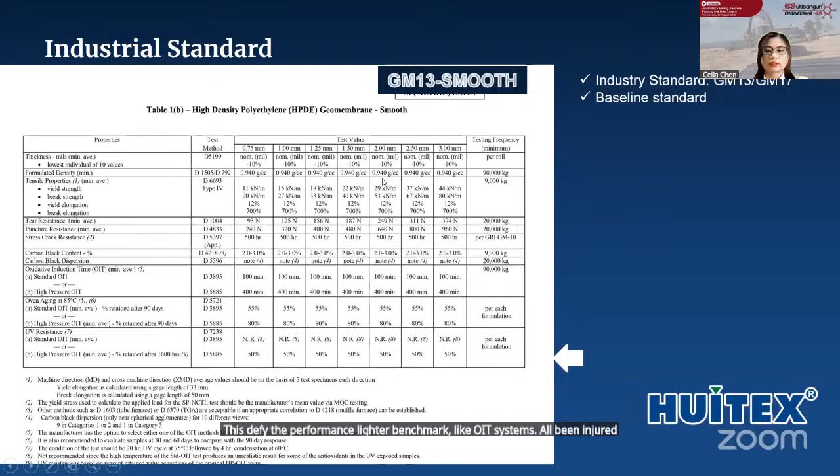GM13 is considered a minimum requirement, not a performance guarantee for every site condition. Passing this test means the liner meets the baseline. Therefore, durability is considered a critical index of the formulation's long-term performance. This defines the performance benchmarks, like OIT, oven aging, and UV resistance. But here's a key point. Just because two materials meet GM13 doesn't mean that they will perform the same. Because resin quality, the antioxidant package, and the manufacturing control make a huge difference.

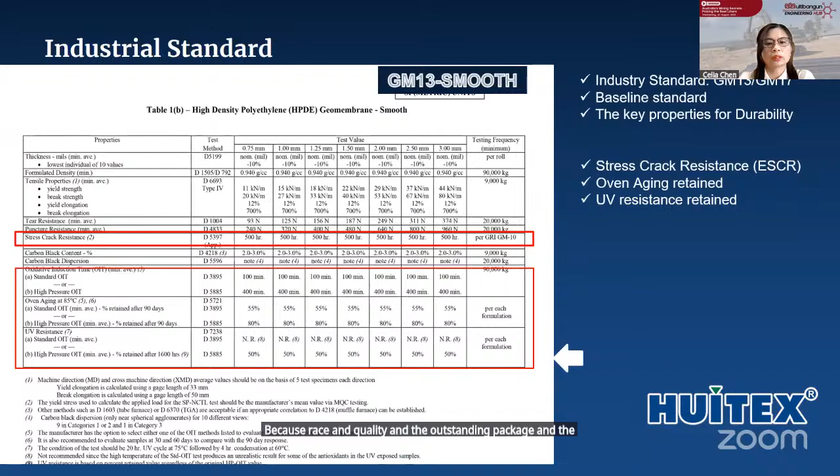Let's move to the Australian standard. In Australia, especially in Victoria, there's a guideline, the EPA Victoria Best Practice Environmental Management guideline. It sets the bar for a high performance membrane. These are built on GM13, but go further, requiring both OIT and antioxidant systems and adapting the formulation for harsher applications. So in this market, simply meeting GM13 is not enough.

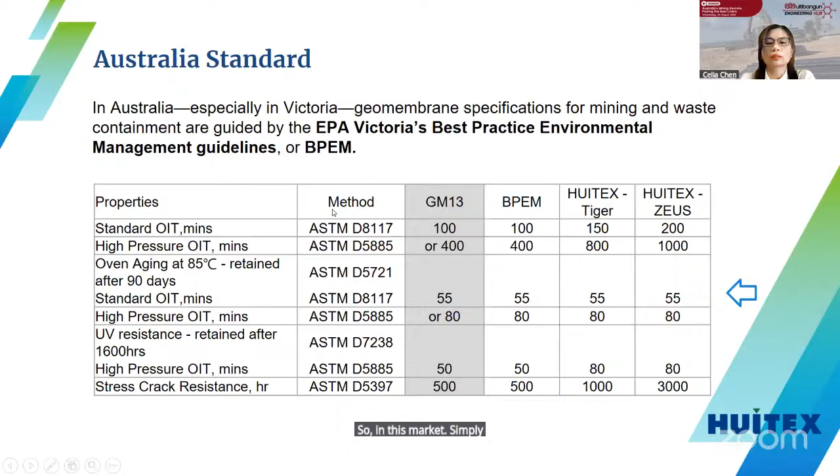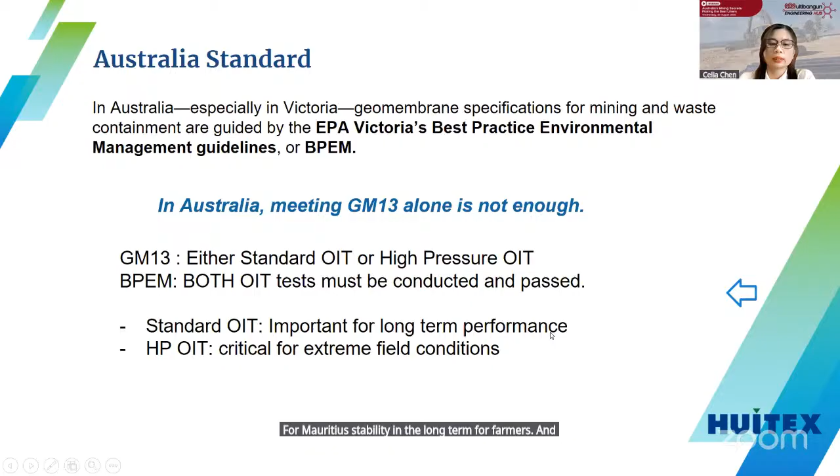Under GM13, a manufacturer can choose either standard OIT or high pressure OIT. Under BPEM, both tests must be conducted and passed, because standard OIT is for formulation stability and long-term performance, while high pressure OIT is critical for extreme field conditions.

So with these standards, in the mining industry the stakes are really high, environmentally and financially. A liner failure can cause contamination, legal consequences, and millions in losses. That's why GRI standards are required by clients, consultants, and even regulators. It sets the standard of trust and safety for the industry.

However, the understanding suggests that the widely used standard, serving as a foundation, is not sufficient for certain critical applications, especially those requiring enhanced durability and chemical resistance. Therefore, a new standard, GRI 42, was released in the last few years.

So we will look at why, explore what the industry standard really means, and how the Australian BPEM guideline builds on these standards. Understanding this requirement is essential, but meeting this standard is only the first step. In real conditions, how do we ensure the material will actually perform over time in the field?

Spec is a starting point, not a finish line. We need to assess durability indicators, the quality of the antioxidant systems, as well as the manufacturing process. Let's look into how many indicators should be considered.

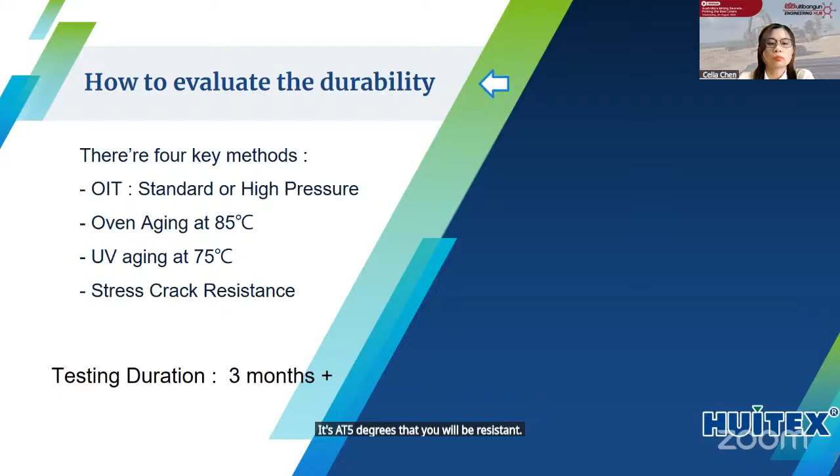There are 4 key methods: OIT, including standard OIT and high pressure OIT, oven aging at 85 degrees, UV resistance, and stress cracking resistance.

The OIT test sets the baseline, but it's only meaningful when matched with the correct aging method. However, some specifications mistakenly use incorrect data and test methods, making them appear to comply with GM13 standards. So let's talk about stress cracking resistance.

These indicators are key factors for durability testing. However, not all manufacturers can follow the specification requirements, as aging test results can take more than 3 months. Sometimes the client cannot wait for the results. Therefore, there is a misconception that it's safe to ignore the durability test.

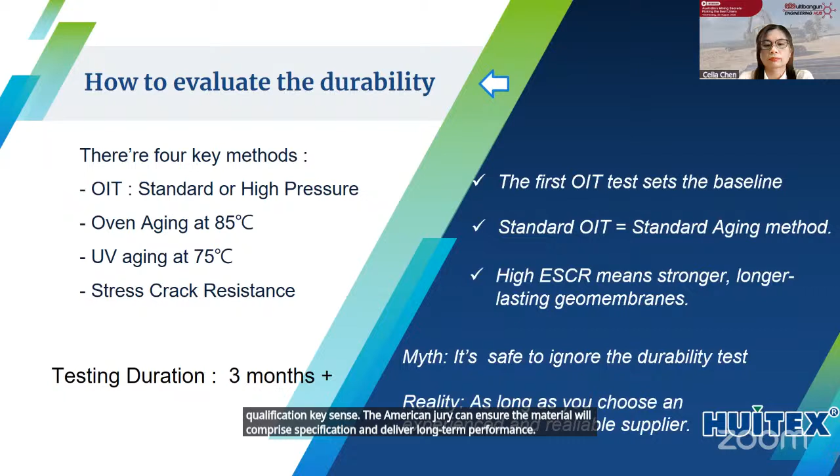So we just checked durability indicators, which are important. Another important factor is how to stabilize the antioxidant system and make sure the quality is stable.

When talking about selecting a good geomembrane, we cannot just look at thickness or mechanical properties. We need to go deeper into the formulation itself. The antioxidant and UV stabilizer system are the first line of defense against aging. Without them, the liner might pass short-term tests, but it won't hold up in the long run.

A good formulation combines 3 key points: primary antioxidant, which stops the oxidation chain reaction before it spreads; secondary antioxidant, which breaks down peroxides; and lastly, HALS, which provides strong UV protection.

Why does it matter? Because it directly affects the 3 critical durability indicators: OIT, high pressure OIT, and stress cracking resistance. If this formulation is weak, the material's service life in the field will be shortened, no matter what the data sheet says.

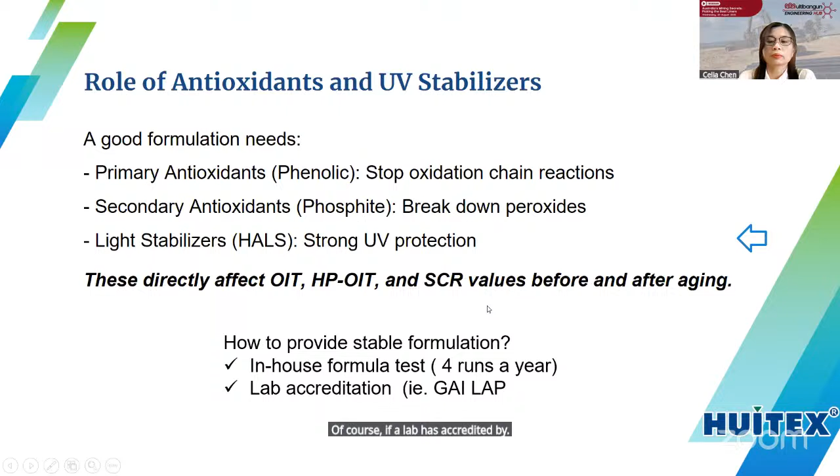So how do we ensure a stable formulation? We would suggest in-house formula testing four runs a year is necessary. Of course, if a lab is accredited by GAI or some third-party laboratory regulation, that would be perfect.

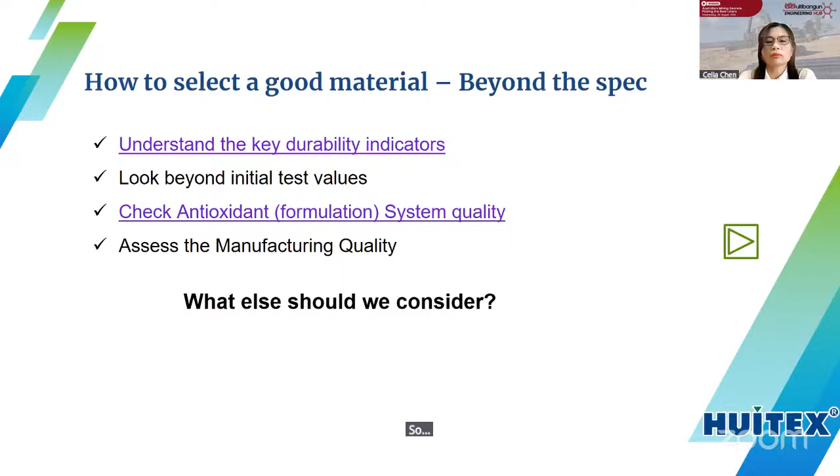So what else should we consider? Be careful of low-cost liners. They may pass the initial GM13 spec but degrade rapidly.

We have to choose the right material before assessing the project's requirements for project bidding.

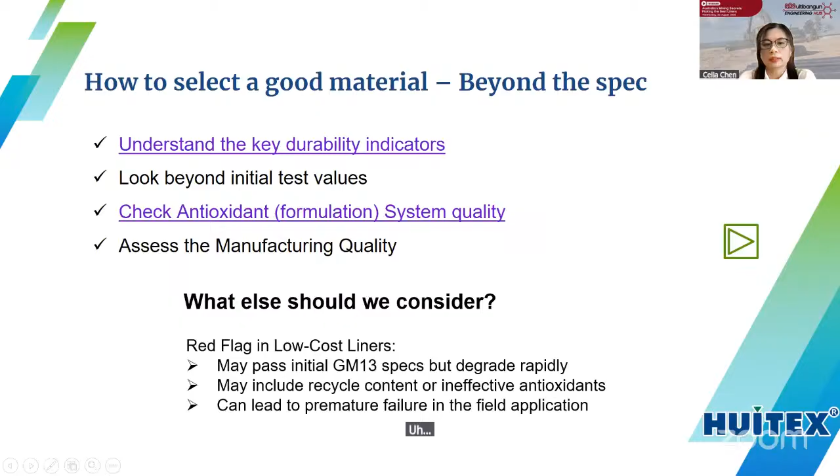So, a common mistake—let me ask you about this: have you ever had the experience of selecting an imperfect liner for a project? Well, if your answer is yes, you are not wrong.

One of the most common reasons behind this is that pricing becomes the dominating factor, especially in a competitive bidding environment. When cost takes priority, selection often relies on visual inspection or basic mechanical testing alone. But the truth is, this method cannot guarantee long-term performance. Sometimes it will fail prematurely if resin quality, packaging, or manufacturing control isn't properly verified.

So how do we prevent this mistake and make sure we get what the specification promises? One of the most reliable ways is by working with a manufacturer who has an accredited quality system. GAI is one of the options. So what is GAI?

It's a global benchmark for the geosynthetic testing program, ensuring results meet international standards like ASTM, ISO, and GRI. It opens doors to international projects, meets regulatory requirements, and gives customers complete confidence that material performance claims are backed by credible, independent data.

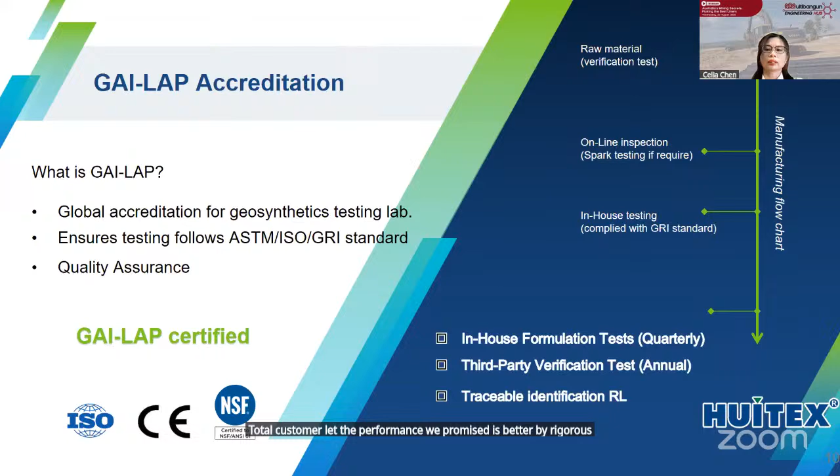So let's move to the common challenges in Australian mining. In Australia, most mining sites are in very remote locations, meaning challenges with logistics, material supply, and even supporting the workforce. This situation happens everywhere in the world - remote, tough to access, and demanding in terms of planning and results. Of course, another challenge is high temperature and UV exposure.

So what happens if the wrong raw material is chosen? It can lead to liner failure, environmental risk, or regulatory penalties. That's why Australian engineering focuses not only on meeting the best standards, but going beyond them, especially in chemical resistance, stress resistance, and mechanical properties.

Australia has very strict quality requirements in the world - geomembrane quality is very important. Projects in Australia typically require high testing frequencies, very intensive frequency in MQA, MQC, even outside independent testing. Manufacturers have to prove formulation stability, and every project needs to demonstrate testing records such as mechanical and chemical compatibility, like immersion tests, stress cracking resistance, etc.

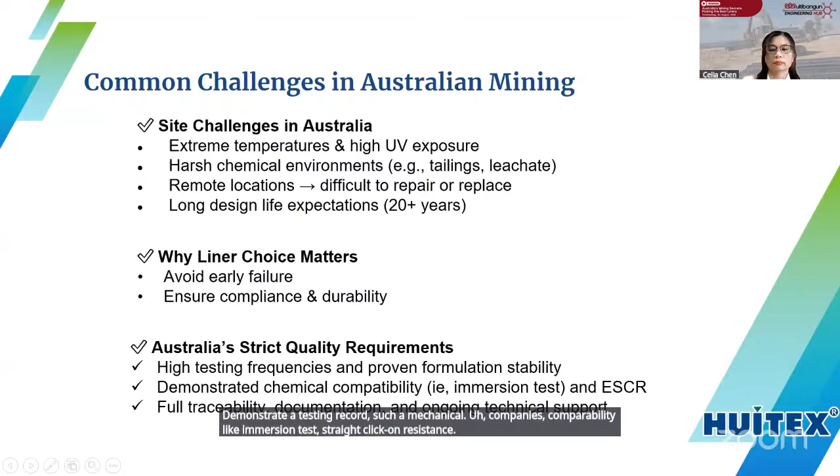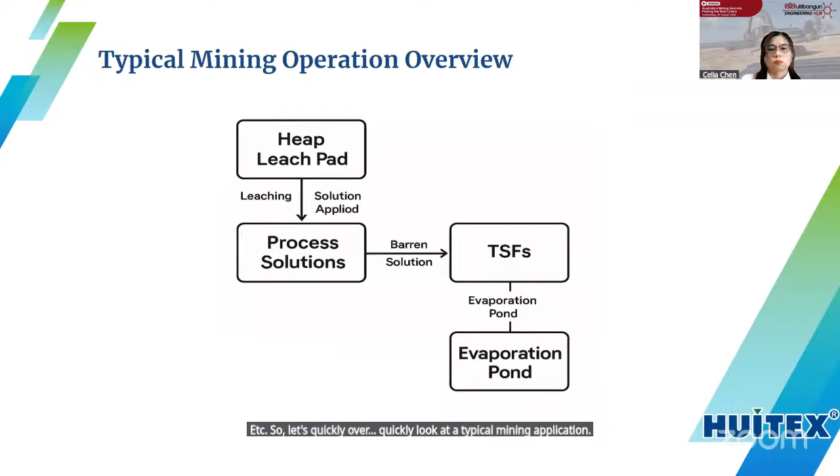So let's quickly look at a typical mining application. First, the ore is mined, crushed, and stacked in a lined heap leach pad. A leaching solution is sprayed on the ore to dissolve the metals, and the solution drains down for recovery. The geomembrane here is essential to keep the solution from leaking into groundwater and to protect the environment.

Once the metals are recovered, the leftover material goes to the tailings, a large engineered pond or dam. Again, the geomembrane makes a difference by safely containing the water, fine rock, and chemicals for the long term.

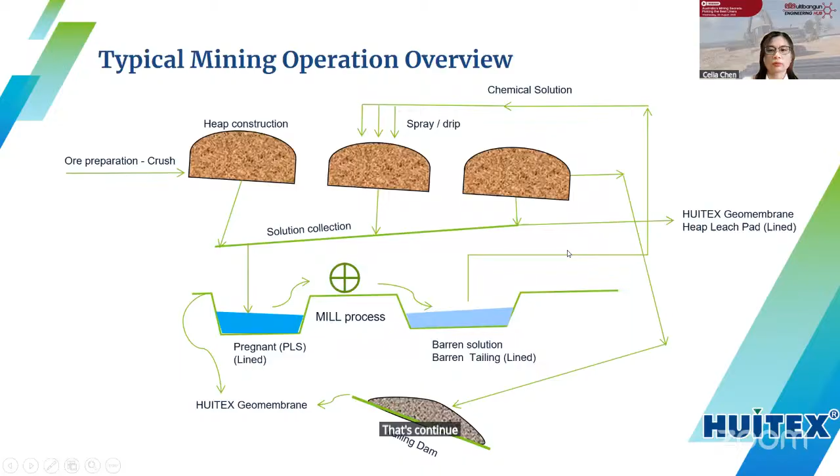Let's continue with some case and project references in Australia. This is a heap leach pad in Western Australia, with high pH value, harsh chemical containment, and heavy loading pressures. This project used double-side textured 1.5 millimeter geomembrane, designed to increase the friction angle and slope stability.

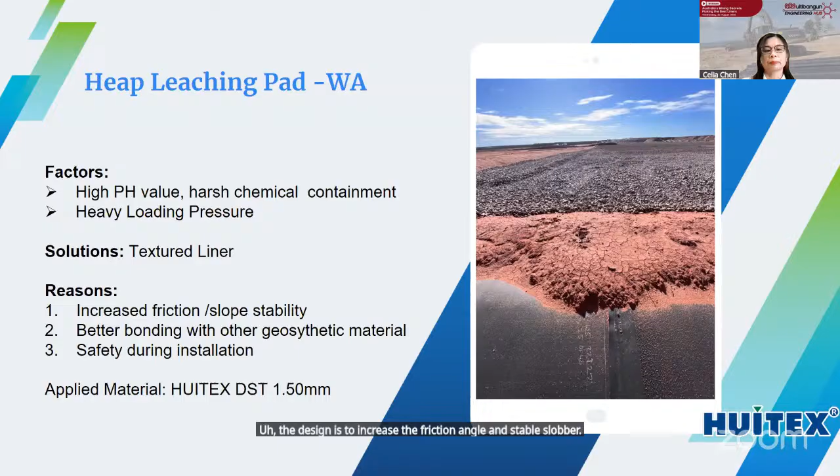So although the leach pad and the tailings storage basically use similar material, their functional requirements differ, which leads to differences in material selection and design. In short, the leach pad focuses on chemical resistance, while the tailings storage facility emphasizes structural strength and durability.

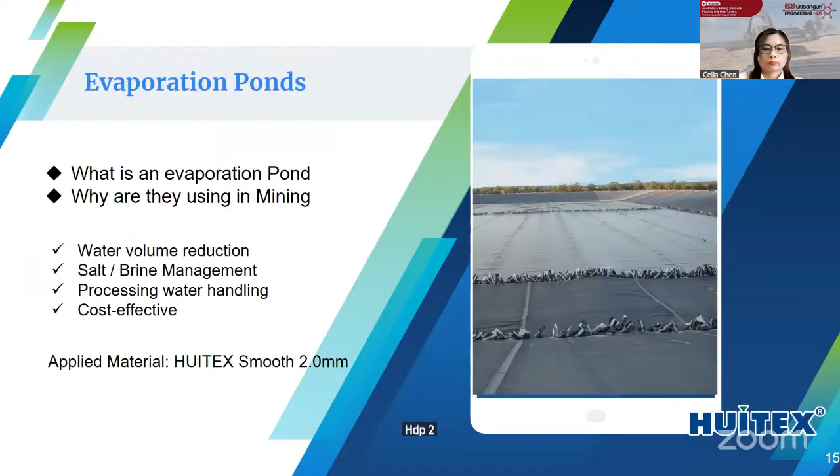So let's quickly overview a typical mining application in Australia - how ore is processed, how the heap leach pad and tailings storage facility work, and the important role geomembrane plays in protecting the environment. But mining today is not just about extraction - more and more, it's also about sustainability and clean energy solutions. Mines are transforming from being purely resource producers into part of a renewable energy future.

Next, let's look at one of the most innovative references, the Kidston Pumped Storage Hydro Project. PSH is pumped storage hydropower - a large-scale energy storage system using two water reservoirs at different elevations to store and generate electricity. The Kidston Pump Storage Project proposes using two former gold mine pits as reservoirs, which makes geomembrane selection quite different and quite challenging.

What's the challenge? There are three challenges: irregular mine pit walls, remote site, and structure interface. First, the pit walls are irregular and geologically variable, so the liner must be flexible and securely anchored. Secondly, the site is very remote, which means transportation and installation of large HDPE sheets is logistically complex.

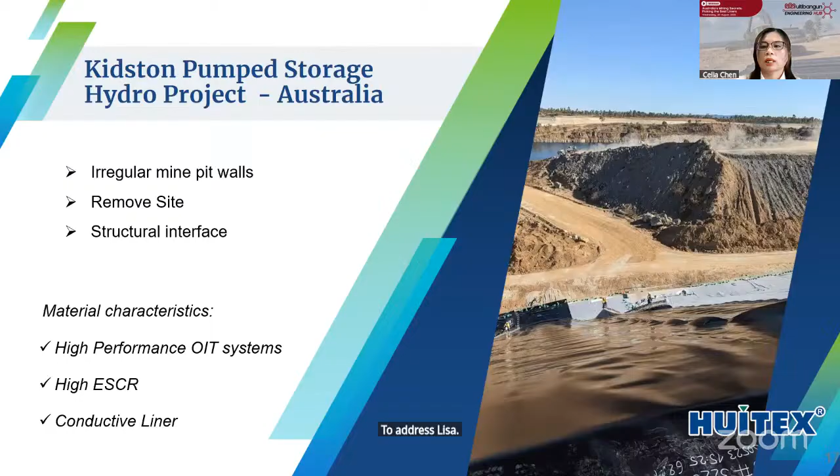To address this, Huitex uses a high performance geomembrane in this application. In this project, it has been verified by immersion test and welding test as well to ensure long-term durability. Plus, the conductive liner can help minimize welding risk during installation, ensuring the liner system performs reliably from the start.

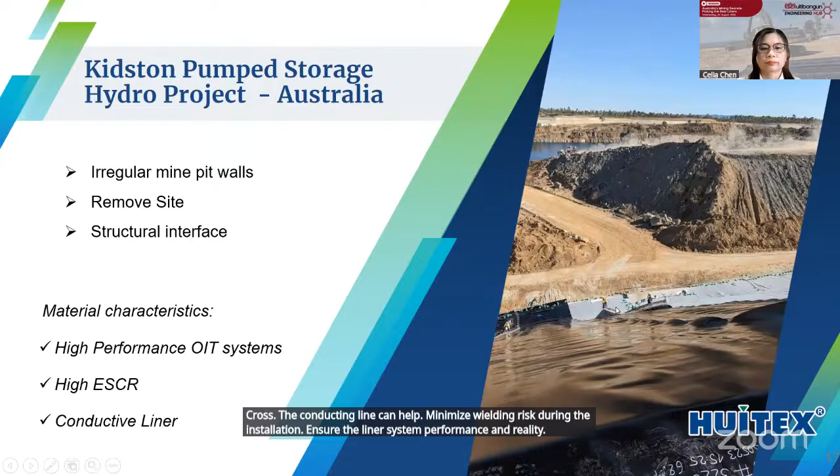Next, we will continue with another renewable energy topic, lithium mining. Why does lithium matter? Lithium mining may not use traditional mining processes like blasting and crushing. It is definitely considered one of the power mining industries. Lithium is a critical raw material for lithium-ion batteries, powering electric vehicles, and renewable energy storage. It supports a global shift to clean energy technology.

Lithium mining has two basic methods: hard rock mining and evaporation pond brine extraction. The left side pictures show a project we had, which is brine extraction. This project is called the 3Q, Tres Quebradas lithium project in Argentina.

It is owned by a high-grade brine-based development being developed under Zijin Mining. It is located within the heart of Argentina, famed Lithium Triangle. It's a high-grade brine deposit of lithium carbonate, with future expansion over a project with 33 years of mine life. The 3Q project is a newly defined high-grade lithium brine complex. There's a key challenge because of the location and the extreme weather temperature difference.

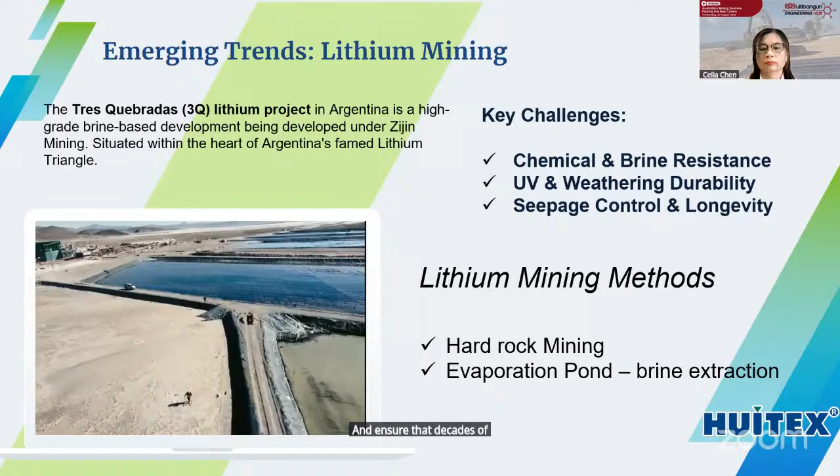So, to conclude that section, let's return to the core question: how do you pick the best liner for your mining project? The answer isn't just in the specification. It's what stands behind the material. A truly reliable liner should come from a combination of three essential factors.

Firstly, as we mentioned, meeting the spec alone is not enough; you should go beyond the spec. Everyone should check formulation quality and outstanding UV stabilizers, and proven durability after aging. The supplier or material should have a robust material verification system. Secondly, watch out for low cost liners, because they may pass initial tests but fail earlier in the field. Last, always rely on accredited testing programs and manufacturers or suppliers with strong quality control.

Raw material isn't just about price or spec, it's about proven long-term performance and compliance with the toughest mining conditions. We are proud to support our clients with solutions that perform, not just on paper, but in the field.

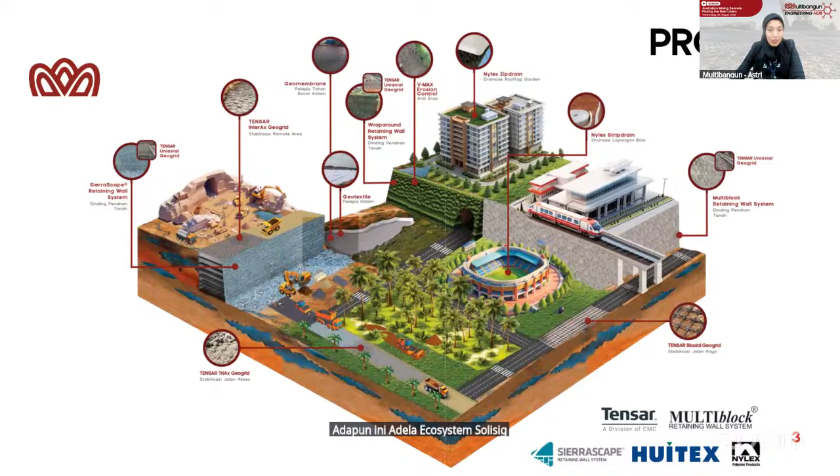Adapun ini adalah ekosistem solusi geosintetik kami secara komprehensif. Dari perkuatan lereng atau dinding penahan tanah, stabilisasi tanah dasar, hingga lapisan kedap air. Perlu diketahui, kami merupakan distributor tunggal untuk produk geogrid Tensar internasional dan distributor untuk membran mereknya Huitex.

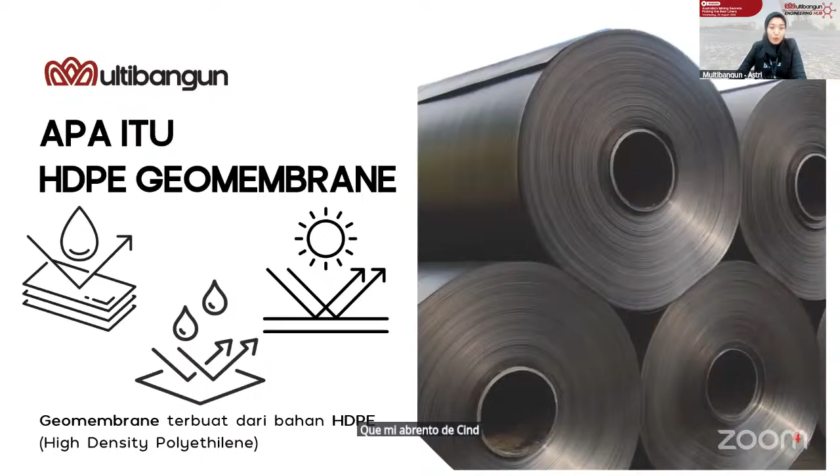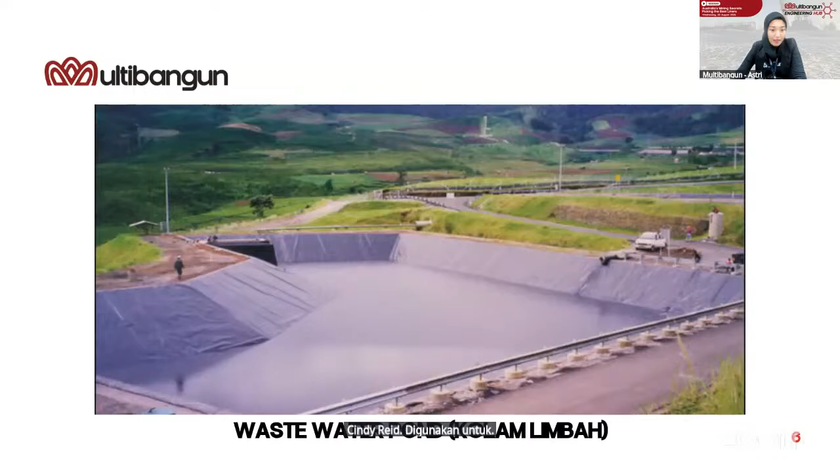Oke, saya akan lanjut dengan material geomembran. Apakah geomembran itu? Geomembran adalah material pelapis tidak tembus cairan yang tahan dan tidak bereaksi terhadap cairan bahan kimia dan tahan terhadap sinar ultraviolet matahari. Geomembran itu sendiri terbuat dari bahan HDPE atau High Density Polyethylene. Untuk penggunaan geomembran Huitex sendiri biasanya digunakan untuk kolam limbah atau waste water pond, kemudian untuk penampungan air atau water reservoir.

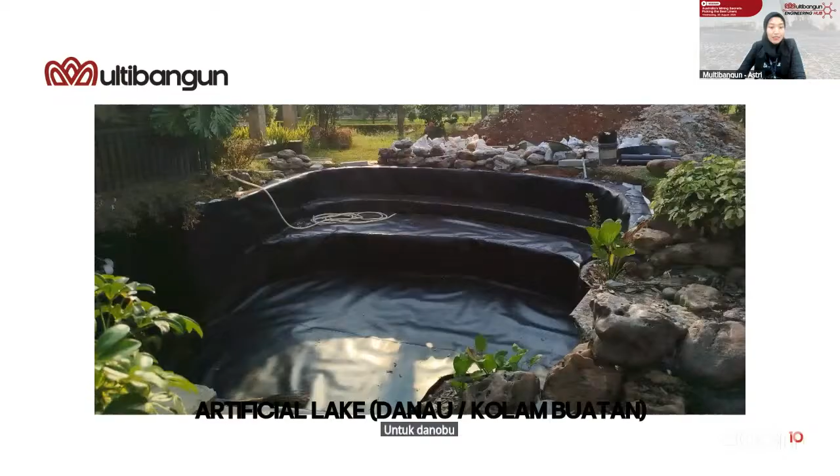Selanjutnya biasa digunakan untuk danau buatan, untuk kolam buatan, untuk kolam hias, atau artificial lake.

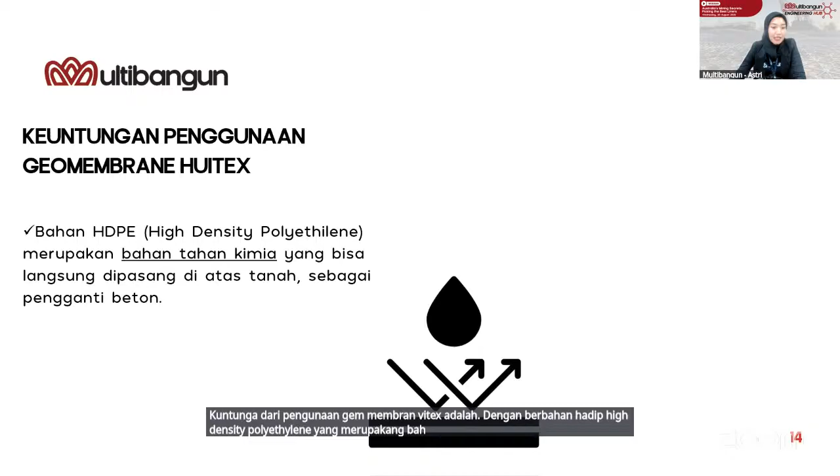Keuntungan dari penggunaan geomembran Huitex adalah dengan berbahan HDPE, High Density Polyethylene, yang merupakan bahan tahan kimia yang bisa langsung dipasang di atas tanah sebagai pengganti beton. Kemudian keuntungan selanjutnya dari geomembran Huitex adalah lebih ekonomis jika dibanding menggunakan beton bertulang, hematnya hingga 30%. Dari segi pemasangan juga lebih cepat, karena setelah terpasang bisa langsung digunakan.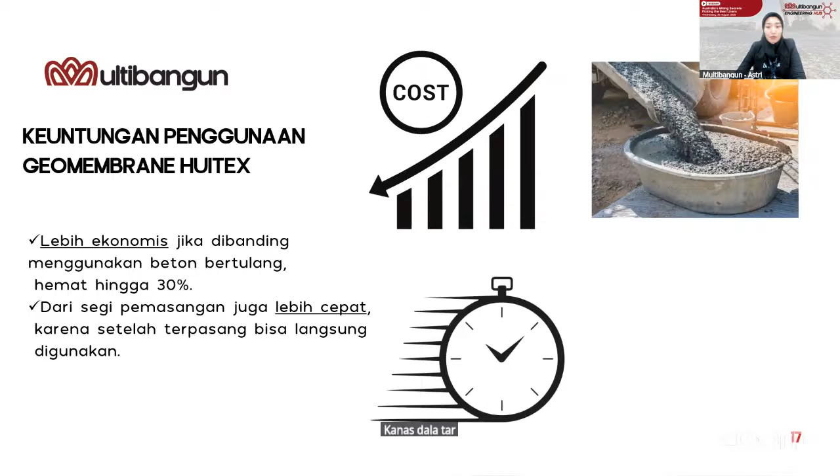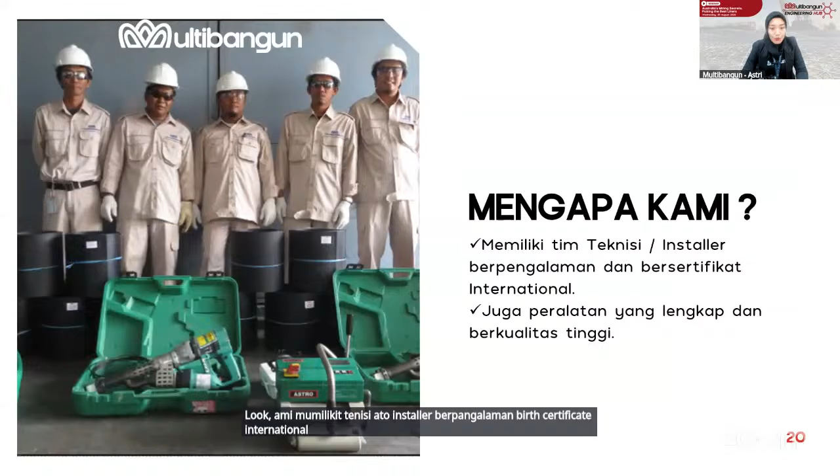Mengapa kami, Multibangun Rekatama Patria? Karena geomembran Huitex yang kami jual berkualitas baik dan berstandar internasional. Lalu kami memiliki teknisi atau installer berpengalaman dan bersertifikat internasional. Juga kami memiliki peralatan yang lengkap dan berkualitas tinggi.

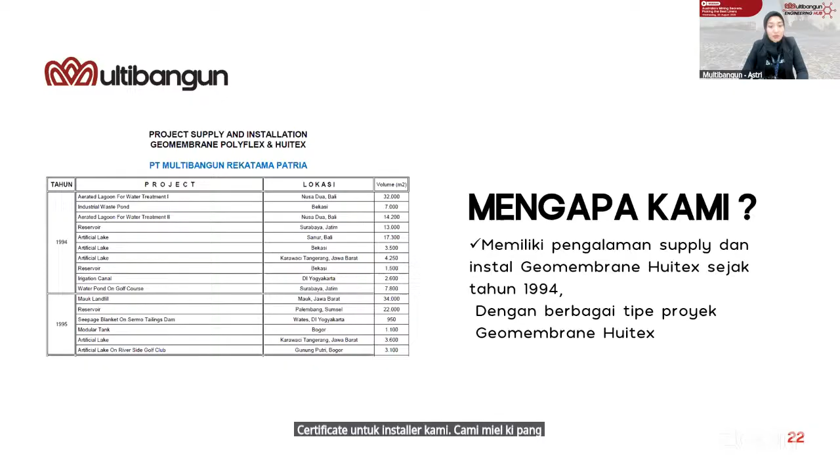Berikut ini adalah sertifikat untuk installer kami. Kami memiliki pengalaman supply dan install geomembran Huitex sejak tahun 1994 dengan berbagai tipe proyek geomembran Huitex.

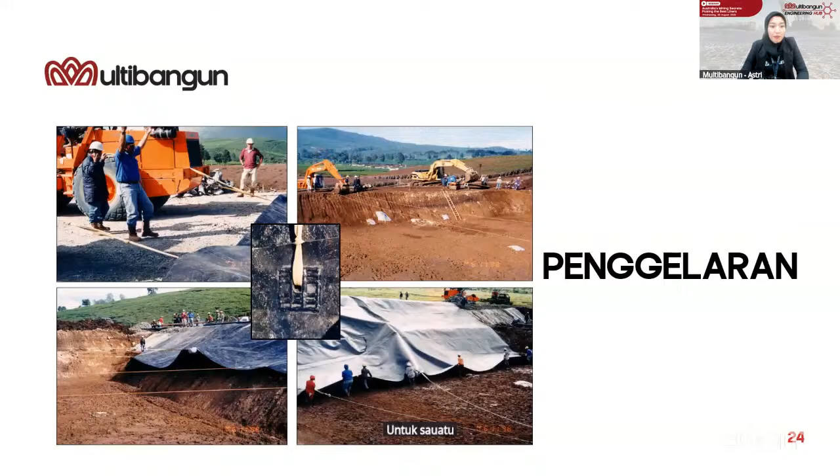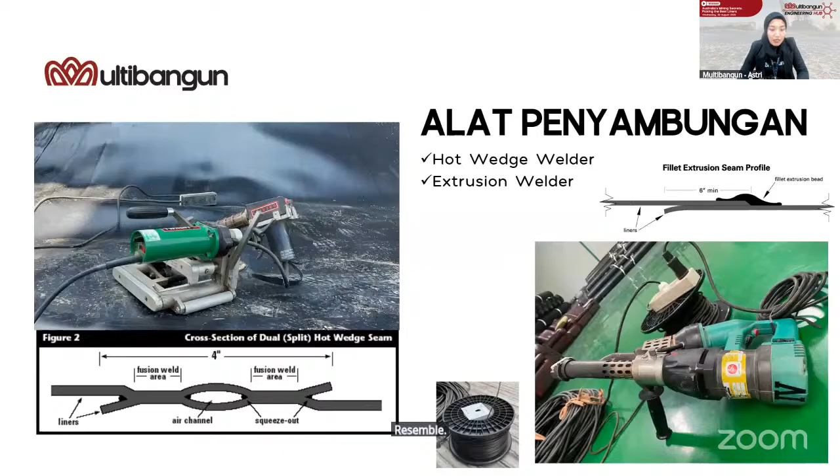Berikut ini saya akan jabarkan proses pemasangan geomembran beserta alat penyambungnya. Dimulai dari penggelaran, dilakukan oleh 7-10 orang untuk penarikan, kemudian diangkat oleh alat berat. Karena untuk satu roll geomembran itu beratnya 1,4 ton. Kemudian setelah digelar, geomembran dilanjut disambung, di mana alat sambung kita yaitu hot wedge welder dan extrusion welder.

Jadi, mengapa Anda harus memilih Multibangun sebagai mitra? Karena pastinya kami menawarkan lebih bukan dari sekedar produk. Kami memberikan keahlian yang terbukti sejak tahun 1994. Kami memberikan produk yang eksklusif dan berkualitas sebagai distributor tunggal Tensar geogrid dan geomembran dari Huitex. Kami menyediakan solusi yang komprehensif untuk setiap tantangan di dalam proyek. Kami memiliki rekam jejak konstruksi dari berbagai proyek yang sukses di seluruh Indonesia. Dan yang terpenting, kami memberikan dukungan khusus dari tahap awal, yaitu konsultasi, desain, hingga implementasi.

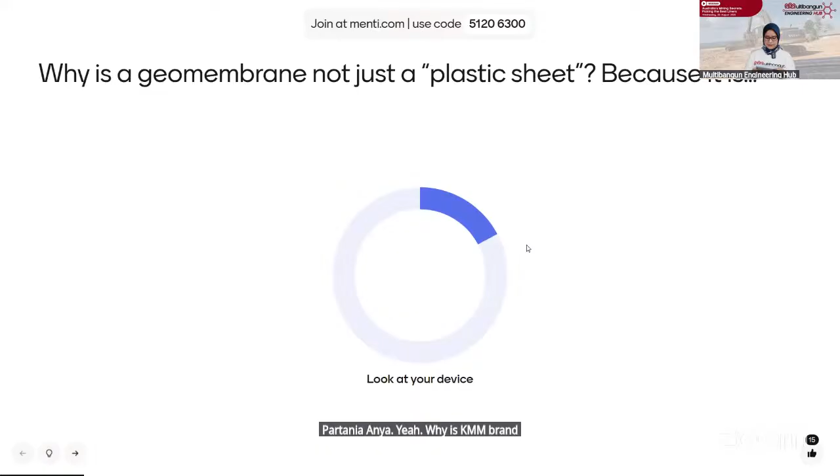Pertanyaannya, why is a geomembrane not just a plastic sheet? Because it is A, cheaper than ordinary plastic sheet, B, lighter and easier to transport, C, an engineered barrier with properties like ESCR, chemical resistance. Ayo Bapak Ibu, kira-kira yang mana? Dijawab dengan benar, tepat, dan cepat.

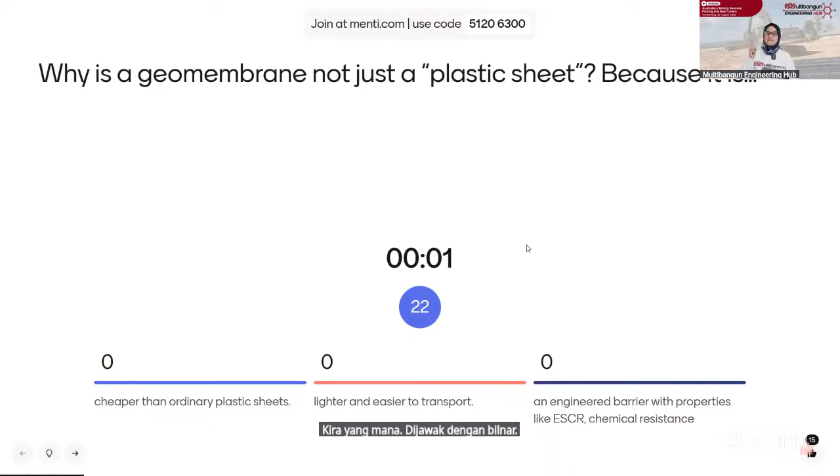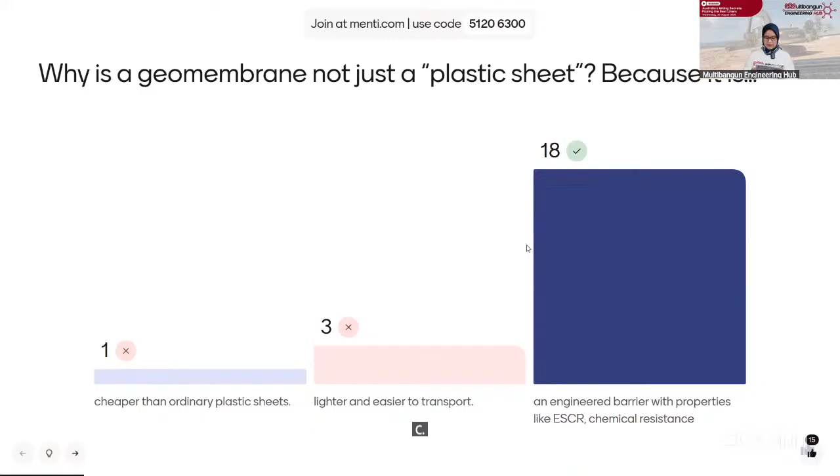Jadi kalau untuk yang paling cepat, jawabannya sudah muncul. Jawaban yang benar adalah C, an engineered barrier with properties like ESCR chemical resistance. Kita lihat berapa orang yang sudah menjawab benar, tepat, dan cepat.

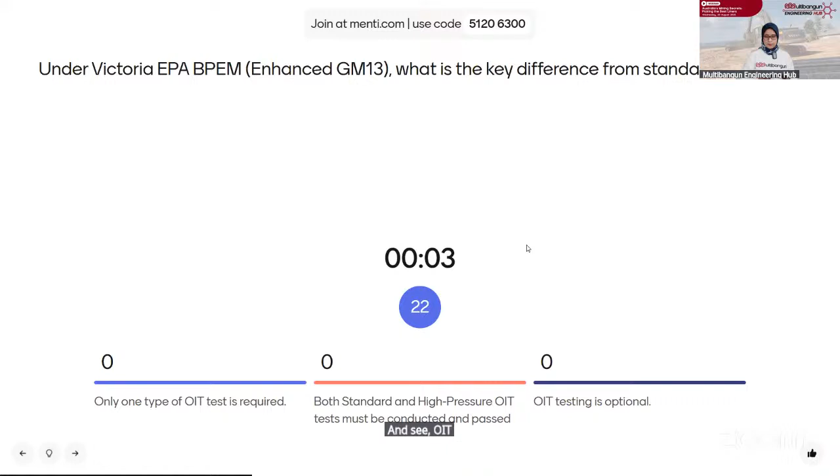Baik, kita mulai pertanyaan kedua. Under Victoria EPA BPEM Enhanced GM13, what is the key difference from standard GM13? A. Only one type of OIT test required. B. Both standard and high pressure OIT tests must be conducted and passed. C. OIT testing is optional. Kira-kira yang mana nih Bapak Ibu? Ayo dijawab dengan cepat dan tepat.

Jawabannya adalah B, both standard and high pressure OIT. Jadi siapa yang sudah menjawab benar dan cepat? Apakah masih dengan orang yang sama? Kalau kita lihat, ada perubahan. Yang pertama Bapak Abdul Zakaria, kedua Bapak Rangga, dan ketiga Bapak Kevin menjadi urutan ketiga. Jangan khawatir, masih ada beberapa pertanyaan lagi.

Kita lanjut ke pertanyaan nomor 3. Pertanyaan nomor 3 adalah, what does ESCR stand for? A. Environmental stress crack resistance. B. Extended strength compression ratio. C. Elastic stability, crack reduction. Kira-kira yang mana, A, B, atau C? Dijawab dengan cepat dan tepat.

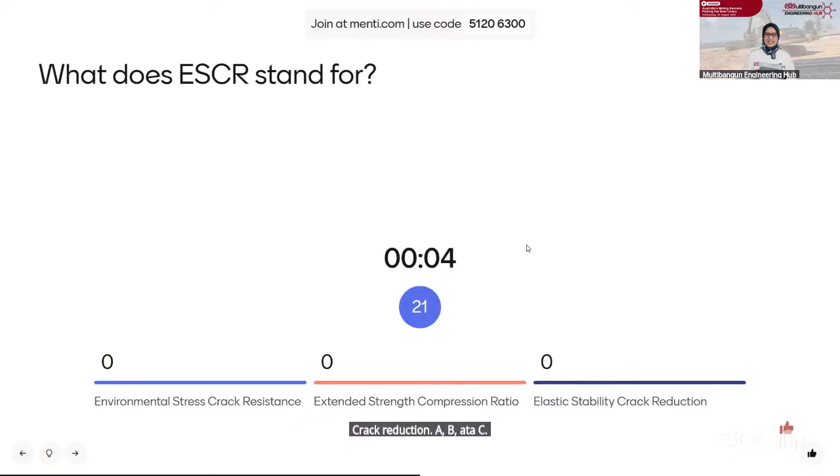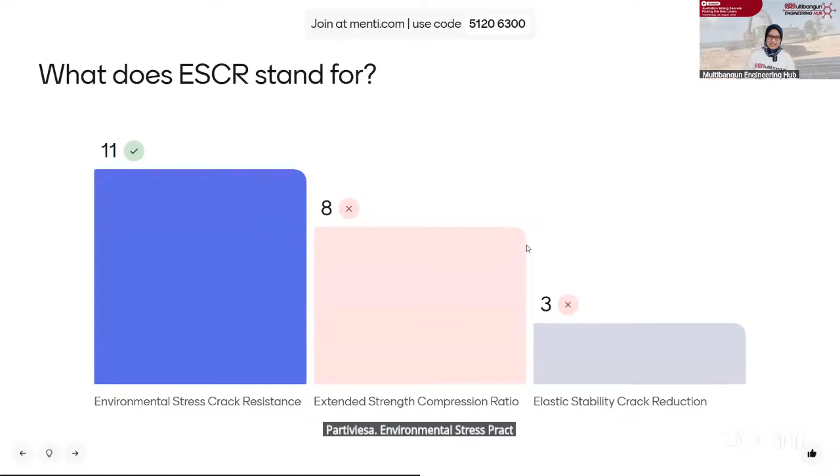Jawabannya adalah A, environmental stress crack resistance. Kalau kita lihat, lumayan banyak yang menjawab benar. Lalu untuk leaderboard-nya, apakah ada perubahan? Kita lihat, ada perubahan lagi, ini memang benar-benar sengit. Yang pertama ada Bapak Rangga, lalu Pak Muhammad Fomal Haut Aditya, dan yang ketiga Shirley Yulianti.

Berubah-ubah nih Bapak Ibu. Dua pertanyaan terakhir sepertinya bisa menjadi peluang untuk Bapak Ibu yang belum masuk ke 3 terbesar. Pertanyaan keempat.

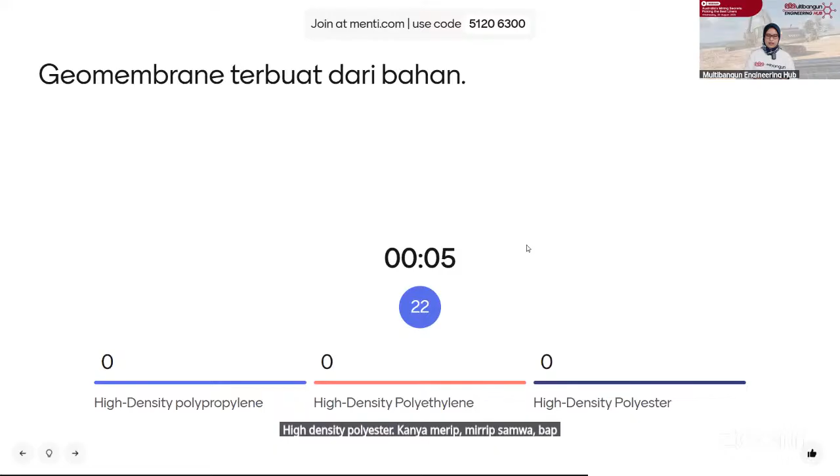Geomembran terbuat dari bahan A. High density polypropylene. B. High density polyethylene. C. High density polyester. Mana nih Bapak Ibu? Kayaknya mirip-mirip semua, mungkin sudah mulai pusing. Yang mana ya, A, B, atau C? Tapi saya yakin yang mengikuti pasti tahu banget.

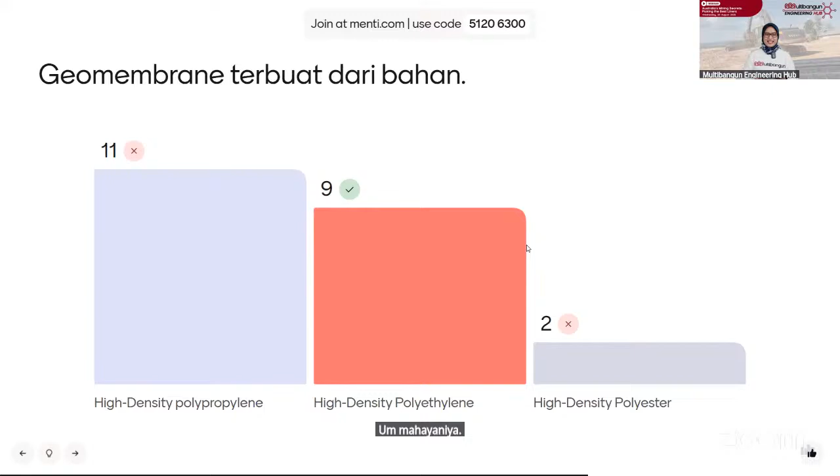Kita lihat jawabannya. Jawaban yang benar adalah B. Ada beberapa yang benar, lumayan. Kita lihat skor sementara, apakah ada perubahan lagi atau masih memimpin? Berubah lagi nih. Di urutan pertama ada Bapak Pomalhut, lalu Ibu Dewi dan Kirs.

Ini masih berubah, sangat-sangat tidak bisa diprediksi. Kita lanjut ke pertanyaan terakhir, pertanyaan kelima.

Pertanyaannya adalah, mengapa geomembran penting dalam pengelolaan limbah tambang? A. Untuk mencegah rembesan limbah tambang masuk ke dalam tanah dan air tanah. B. Meningkatkan kadar mineral agar hasil tambang lebih bernilai tinggi. C. Mempercepat proses oksidasi logam sehingga limbah cepat terurai. Kira-kira yang mana? Bisa nih, harusnya benar ini.

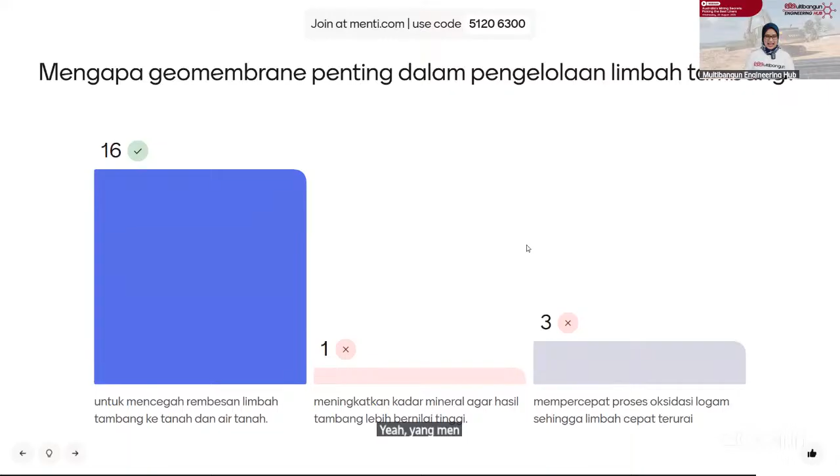Benar sekali, mayoritas bisa menjawab benar karena jawaban yang benar adalah A, untuk mencegah rembesan limbah. Jadi kalau kita lihat perolehan leaderboard-nya, apakah ada perubahan lagi? Apakah masih memimpin? Kita lihat, Pak Muhammad Aditya masih memimpin. Yang kedua adalah Ibu Dewi, dan yang ketiga adalah Bapak Kevin Darmawan. Itu adalah 3 teratas pemenangnya.